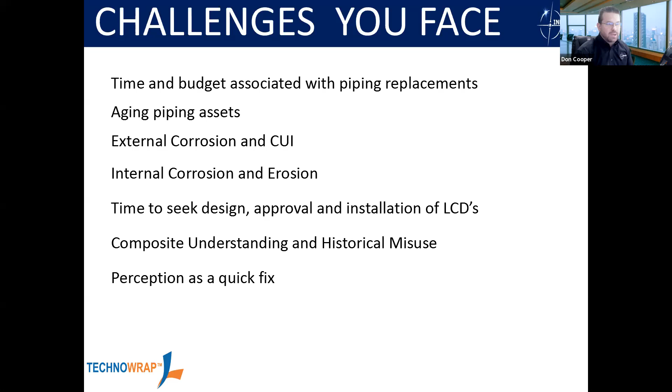I've seen comments where people say, well yeah, we've used it but it doesn't work, it didn't stop the leak. The reason for that is they were installing composite over an active leak and didn't mitigate the leak first. So there's a lot of reasons why we want to really get the information out on how to use composite properly, how to engineer it properly, how to install it properly so it's a robust engineered solution for maintaining your assets. There's a lot of perceptions of it being a quick fix, and that comes from historical incorrect uses of composite.

And then finally, particularly in Canada, there's a challenge of local pressure authority approval and acceptance, for a lot of the same reasons I mentioned around historical misuse, that we haven't yet gotten solid recognition with all of our pressure authorities on a systematic step-by-step way that we engineer, install, and get the right competency of our installers qualified in the same way we would do any other pressure component repair.

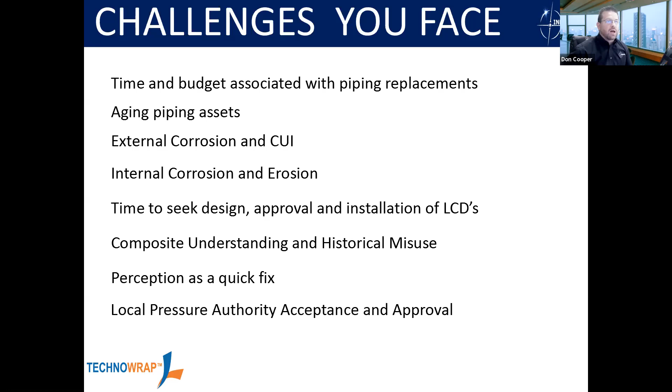Don, you framed that really nicely in terms of some of the issues people have had with composite repairs in the past, and it's something we've seen a lot of as well, unfortunately, as is the misuse of composite repairs. What I'm going to do is frame a little bit of the background of composite repairs, a bit about who we are and some of the benefits. I'll talk through some of our product range, and then I'll hand over to Gareth, who will take you through some of the technical detail.

I'm sure there's a mix of different levels of understanding of composite, so I'll take it back to the basics. A composite repair is used to restore the serviceability of pressure systems, pipelines, or structural components that historically have been damaged or weakened by corrosion. So what they allow operators to do is extend the production life of their plant or asset.

The Technowrap brand itself has been around since '92, so we have over 20 years of in-service history of the product. We have a big portfolio of operators we work with, most of whom are here today, all over the world, so it's great to have that experience here. We also have a really good track record of installations—about 25,000 installations worldwide—and that's only the installations we've applied with our own technicians. If you think of all the third-party applicators we've trained, that number is probably significantly more.

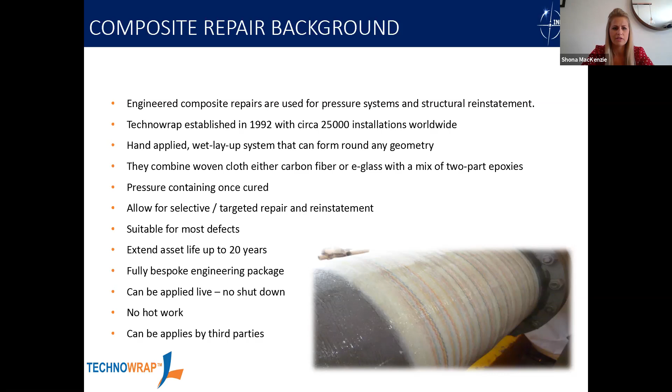I'm just going to skip on to the next slide, and hopefully there should be a video that I can run. This is just an application video that we have, showing you the basics. I'll run the video on my end.

I did notice, I wasn't sure if this video had to have sound or if you were walking through it. There wasn't any sound on it when I was playing it earlier this morning. No, that's fine, I'll just talk through the application. There shouldn't be any sound.

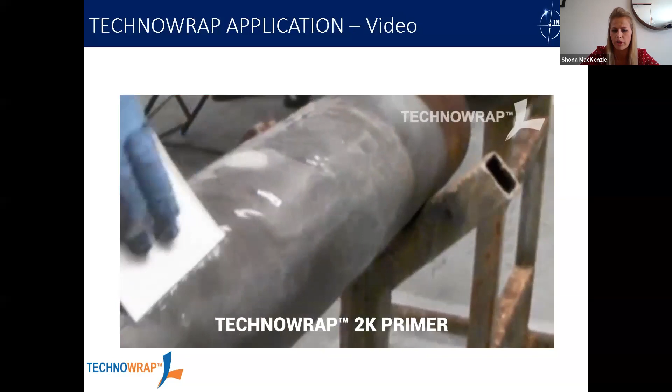A basic installation of composite repairs requires a surface preparation element at the start, so that's not included in this video. We've assumed that this pipe's been blasted, and what we do is use an acetone wash to clean off any debris on the pipework, and then we prime it using an adhesive primer.

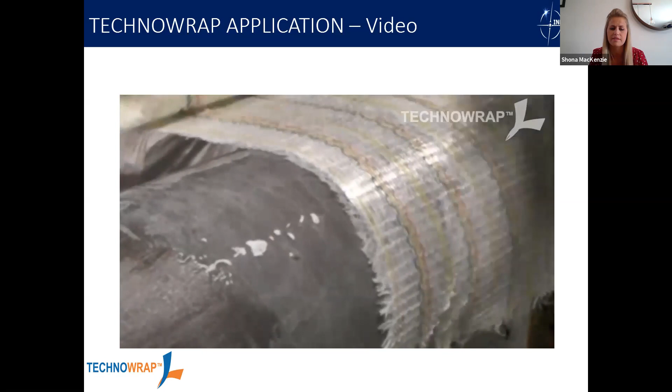What we do is we wet the resin system into the cloth itself. That resin system is in two parts, part A and part B, and they're combined and measured in the right quantities. It's wet into the cloth, and then that is applied over the pipework.

...and this is applied from the middle, and we work that all the way along the composite itself, and that pushes out any of the additional resin system that's not required, and it removes any air pockets that might be within the composite itself. Now, not all repair providers will apply their layers in stages.

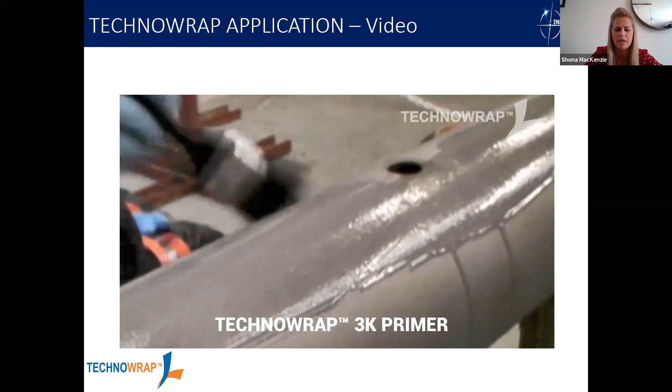So we tend to do two layers as the first application, and then we do a compression in between layers. We'll do a sort of low load cure in between, so not a full cure, but just enough to make sure there's no air pockets in between and that we've got good compression between the layers. It essentially promotes a better quality adhesive through the layers of the composite.

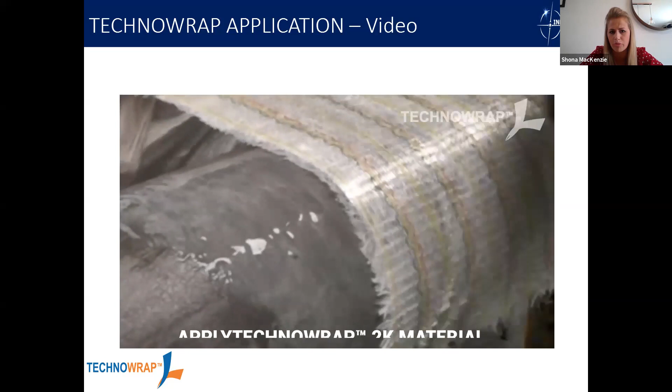Just showing you the video again, but it's relatively straightforward. As I said, it's a wet layup, so it can form into any geometry, whether that's a straight, a bend, or a T. We can account for all different geometries of pipework, which makes it a very simple and easy installation.

That doesn't mean to say that we will accept every repair. There are of course limitations to composites. So if it's not the right scenario for us, we will turn down the job. It does have to be suitable for that application.

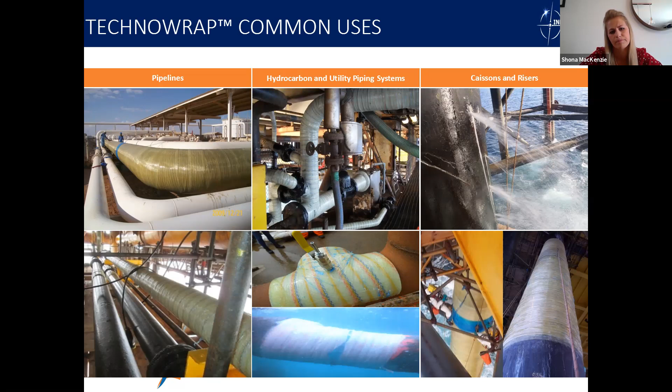Taking composites a little bit further, there are of course pressure system type repairs, but we also considered all sorts of different repairs for structural components as well, whether that's decks, tanks, roofs, cladding, beams, or vessels. There are so many different applications for composite repairs, a variety of options.

Just to answer a question that came in, Tony Preston asked about bead blasting. Can you touch on the surface prep requirements, since we didn't show it in the video? Yes, we'll come on to that, but I'll quickly touch on it now. Obviously it's the critical success factor of composite repairs.

We require good surface preparation in essentially the landing areas for our composite repairs, as does any composite. SA 2.5, like grit blasting or sand blasting, is the preferable method of preparation. However, we can also accept mechanical preparation, so ST3 prep, and on very few occasions hand preparation. You just don't get the same quality of adhesion when you use hand preparation, but if it's external corrosion on low pressure lines, we may be able to consider it. But Gareth will touch on the technical detail on that further in the presentation.

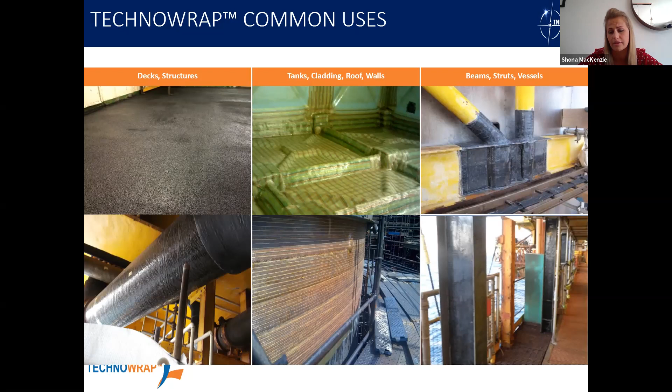We've got a variety of other comments coming in that I think we'll be able to cover as we go through, on curing time, on temperature, and specifically Jeff Wiseman is asking about ABSA approval. We'll touch on that, Jeff, so please bear with us.

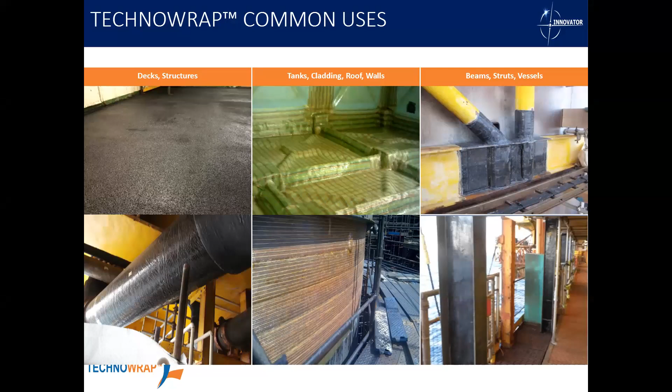Okay, I think this answers one of the questions that just popped up. There are of course limitations with composite repairs in terms of pressure limitations - you're looking at around 3,626 psi on a 12-inch line. That will vary slightly depending on the diameter itself, so the smaller the diameter, the higher the pressure it can see, but that's just a general rule of thumb. If the defect itself is through wall, we're limited to a pressure of around 725 psi.

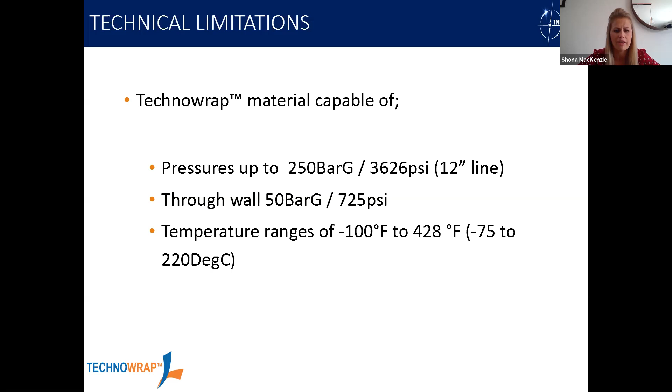And that's for a leaking defect. Temperature ranges: this is an in-service temperature of -100 Fahrenheit to 428 Fahrenheit, or -75 to 220 degrees Celsius. So there's a good range of temperatures covered for in-service temperatures there.

Looking specifically at our product range, we have 3 main types of cloth. The one we'll probably talk about most is the triaxial glass fiber cloth, our TechnoWrap 2K. That's generally used for standard piping systems, hydrocarbon and non-hydrocarbon. As I said, that's a triaxial fiberglass cloth combined with our different epoxy resin systems, which you can see listed below, and I'll take you through those.

We also have a quadraxial carbon fiber cloth, which tends to be used for more structural components or when considering external loads, again combined with any of the different epoxy resins. Essentially what we would do is complete an application sheet and make the assessment as to which cloth type and resin system should be used for that particular instance, so it doesn't have to be decided by the client.

For the resin systems, we have low temperature and high temperature resin. The low temp is a quick curing resin system at low ambient temperatures, with an in-service temperature, as mentioned previously, of -100 to 200 Fahrenheit. The high temperature resin is suitable for in-service of 200 Fahrenheit to 428 Fahrenheit, and that does require post-curing or heat in order to cure the resin.

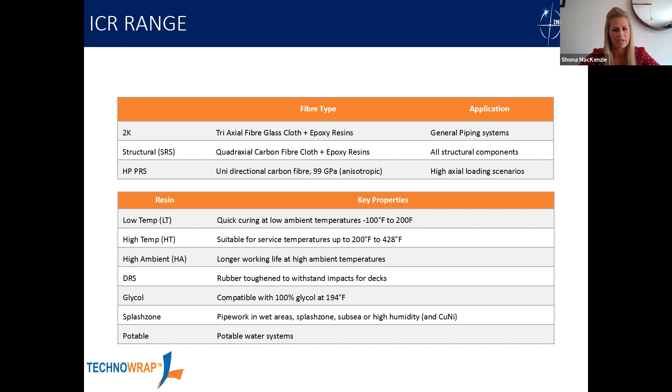So, generic types of defects - we can cover most types of defects essentially. External corrosion is the standard application for a composite repair. Obviously the application of that composite will prevent any further corrosion, and so the defect size or remaining wall thickness at the time of installation is used in the design itself. We also can look at internal corrosion and through-wall defects or leaks.

The thing to consider here is that the composite repair will not stop the internal corrosion, so we would have to assume that internal defect would grow through wall during the life of the repair itself. So if we designed it for, say, 15 years, we would need to understand the rate of corrosion or make some assumptions within that design to assume that corrosion will continue underneath the composite.

And also cracks - ultimately that depends on the orientation and the loads. If you think about axial loads, they would obviously continue to propagate out with the sides of the composite repair. If it's in the circumferential position, then it's not such an issue - we can design for a full circumferential slot. And we can also repair mechanical impacts and dents.

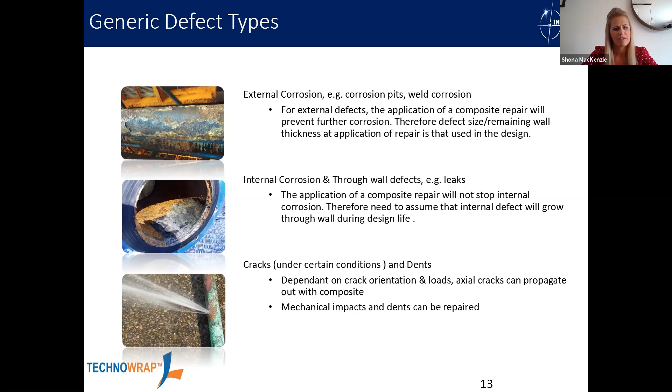One of the things we mentioned previously was the standards. There are two applicable standards for composite repairs. The one we use in the UK is ISO 24817. In America and Canada, I believe it's ASME PCC2. Both are essentially very similar in their standards, and they provide guidance on installation requirements, competencies, testing, and the design methodologies that we have. They are, as I mentioned, very similar in the detail within the document.

There's not any significant differences. The main difference is the design life. ASME classifies defects as short and long term, I believe - Gareth, you might want to correct me on that. ISO is anything up to 20 years, depending on the design conditions. Also, external loadings and temperatures are not considered within the ASME document - sorry, temperature factors for through-wall defects only is not considered. So as a result, the ISO standard gives you a slightly more conservative value when given the same inputs to both.

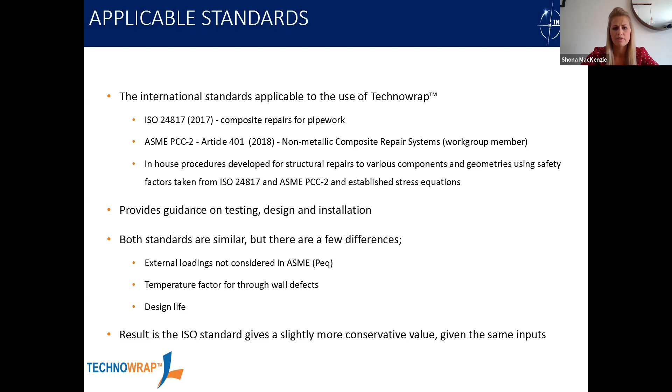So also off the back of that, we have - sorry, Don, if you could just move on to the next one - we have all of the main types of approvals and third-party assurance. So TechnoWrap has approval and certification from ABS, DNV, and Lloyd's Register, essentially just certifying that we are compliant with the ISO standards.

I'd like to just comment here and add some local flavor on the approval process within Canada. I'm not sure if Chris Coombs is still with us - I know Chris had to step away for a few minutes, but I'll give you - oh, there's Chris.

Hi, perfect. So a couple of things to consider in Canada. What Shona talked about there, particularly for onshore-based facilities, which most of our audience is likely onshore-based facilities - there is ASME guidance with ASME PCC2 that provides guidance on the system that all operators and/or pressure authorities should use in evaluating composites. Within Canada, there is precedent for approval of composites, specifically within the Z662 CSA standard for pipelines, which has clear processes and approvals for composites, and has been used in the pipeline industry under that guidance for many, many years.

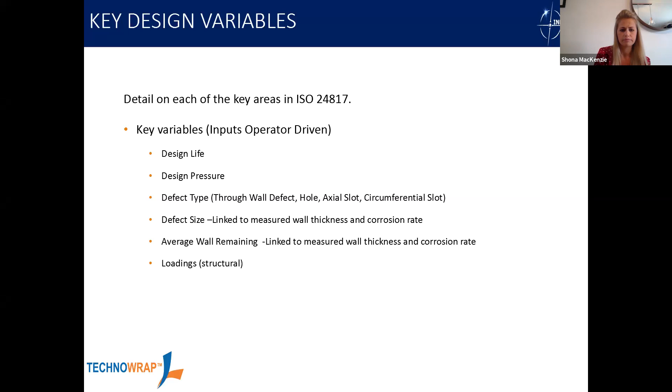Thanks, Shona. So over the last few slides, Shona and Don have both mentioned a few key words, so I'm going to go into those in a bit more detail.

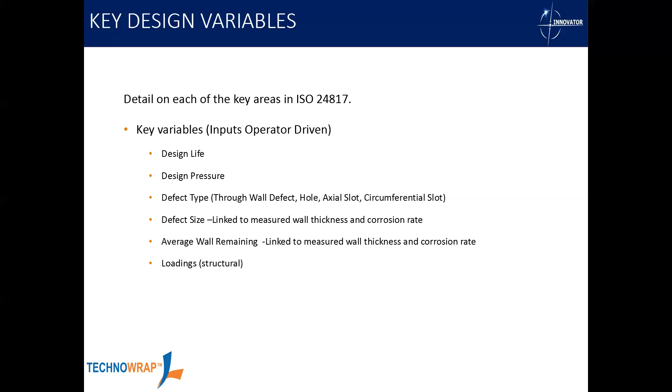The first one was bespoke engineering. They've already said all of our repairs have got bespoke engineering to support them, but what we need for that is to know what inputs to put into that engineering - things like pipe diameter, design pressures, operating conditions, all the design conditions, design lives, defect types, defect sizes, remaining wall thicknesses, any loadings, whether there's any external loadings in the pipe. So as you can see, there are quite a few design inputs, which is why we need to do each repair on a bespoke basis, as there's probably no pipe that has all of those exact same conditions anywhere on your asset, maybe in the country.

Leading on to the design life of the repair - for the ISO standard, this sets the figure between 2 and 20 years. For PCC2, as Shona mentioned, it gives you a range between short-term and long-term. However, what the range actually indicates is a short-term condition is 2 years and a long-term condition is 20 years, as per the ISO standard. So both are very closely tied. But what that does mean is, for the PCC2 standard, you can actually extend the design life out, as long as the design conditions allow - you can extend it further than 20 years if required.

What this comes down to is the actual strain within the composite. The fiberglass will probably have a failure strain of about 2.4%, maybe carbon about 1.5 to 2%. What we do is derate the allowable strain based on design life. So a short-term repair, say a 2-year repair, would have a higher allowable strain than a longer-term repair, which would have a lower allowable strain.

So simply, we're putting a bigger safety factor onto longer-term repairs, and the reason for that is creep in the composite. Unlike steel, the composite actually degrades as a function of load and time. We're not talking low loads here, we're talking near ultimate failure strain, ultimate failure stress, where you'd see the composite begin to creep. So the allowable strain actually decreases as a function of the load it's seen and the time it's been applied for.

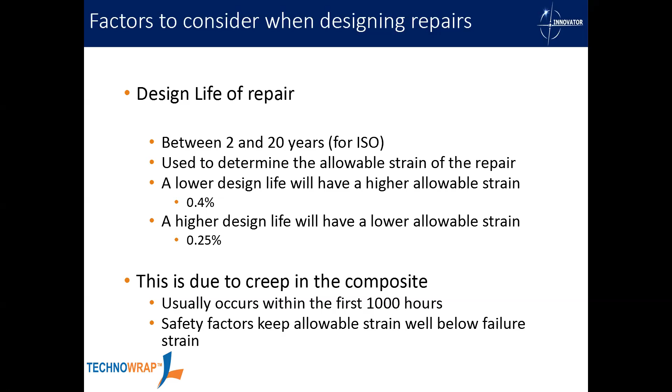So when we actually engineer a repair, there's a few questions we want to ask ourselves. We want to know initially, is the repair strong enough to carry the pressure load - that's just stress strain calculation, looking at hoop stress and axial stresses.

The next point brings in the second keyword we're looking at, which is adhesion. Adhesion is probably the most important thing when it comes to a composite repair and using composite materials to fix damaged pipework or structural components. So we want to know, is the repair actually going to remain bonded to the steel? That's an adhesion check that we do, which I'll go into in more detail on the next slide.

Also, back a slide please. Thank you - I was trigger happy there.

Too keen. So yeah, we want to know as well if there's any impact loads - will it withstand the impact? We also want to know, is the repair going to be long enough to transfer any loads into the composite? We don't just apply these repairs to just the defect - we need to go a certain landing length past the defect itself, simply to get that well-bonded zone to enable any load transfer to the composite.

What we get out is when we do the design calculation, we get a repair thickness - how thick does the composite need to be to take the applied loads? Generally that's up to about 1 inch thick. We have done some repairs...

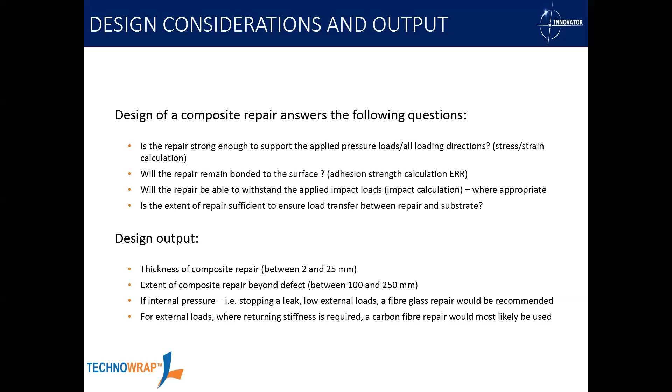Generally, where there's external loads, where stiffness is a key driver of the repair solution, we'd use the carbon fiber, simply because the Young's modulus of the carbon fiber is that much higher than the fiberglass.

So back to adhesion. As I said, this really is the most important thing when it comes to composite repairs. If we don't bond, you don't transfer load into the composite, therefore the composite isn't actually doing anything, it's not fixing the problem. And the way we quantify adhesion is with an energy release rate.

This is a fracture mechanics technique that we use to basically say what load can you transfer through a bond line without failure. The way we do this is we calculate it using pressure. So we have a set pipe with various size defects and apply pressure to failure. We can then get the data points and extrapolate for different scenarios.

And as I said, the repair performance is controlled through the adhesion. The more load you can transfer through that bond line, the better the composite will be. And there's a few factors that actually affect the level of adhesion.

One of them is surface preparation, which we've had a few questions on. That comes down to the cleanliness and the profile that's achieved. I've got a slide on that next.

Another one is the actual substrate material itself. Is it carbon steel we're repairing? Is it stainless steel? Is it Monel? Is it a duplex steel? We bond differently to all of those different materials.

And then just to add in a few more options, every repair system we have bonds differently as well. So the fiberglass will bond differently to the carbon fiber products. So there's quite a few variables again there.

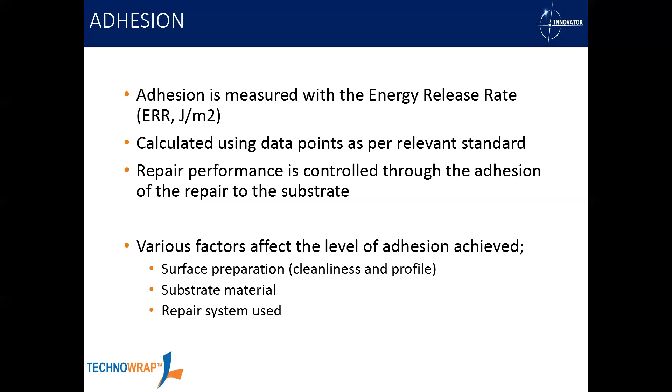So then back to that bespoke engineering that we offer, they consider all of these different energy release rates, all the different substrate materials, repair systems, the surface prep. There's a huge number of combinations there that we have to account for. Next slide, please.

So generally, we would look for a grit or sandblasted surface profile. This gives us the best cleanliness and the roughest, most irregular profile as well. So generally, we would work to an SA 2.5 standard with an average of a 60 micron angular profile.

In some circumstances, we can apply hand prepped profiles, but if you've ever tried using emery paper and files and needle guns, it takes a very long time to even remove a layer of paint. So it can be very difficult to get a very rough profile and a very clean pipe as well. But it may be suitable for low pressure drain lines, but anything more than a bar or two, it wouldn't be suitable whatsoever. So generally always aim for the best, which is the grit or sandblasting to SA 2.5 and 60 microns.

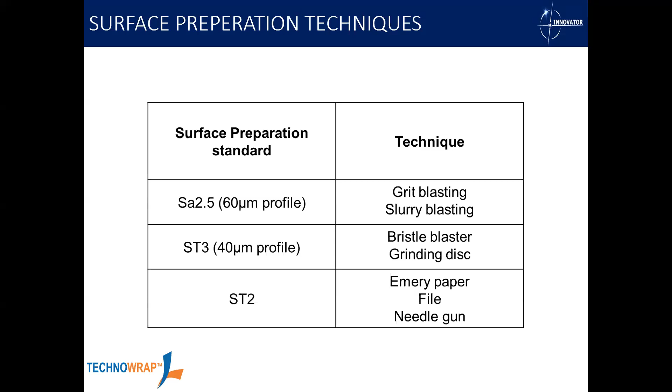One of the biggest problems that I've seen with so many clients who try to self-perform this is the surface prep tends to be hand surface prep like what you're mentioning here, and they just don't get a bond, and they then deem that the repair doesn't work, but it was all in the installation process. And we'll touch on active leaks here in a little bit as well, because I know we've had some questions on that.

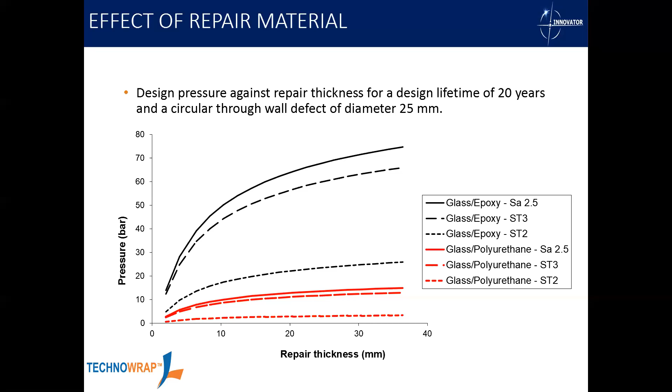What's important is that we've carried out the testing to establish the data for each different scenario. For every surface substrate type, we've done different levels of surface preparation and tested our various repair materials on there. So if you come to me requiring a design calculation, we have that data to back up the calculation itself - which is very important when you're supplying engineered repairs.

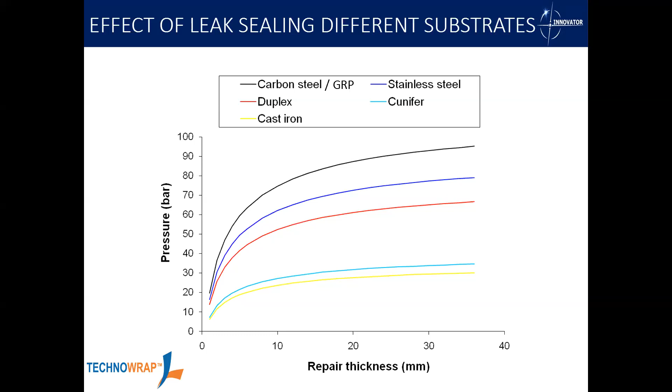So now we'll move on to a bit of the life-size testing or scale testing that we've done on some of our repairs. We've done a huge amount of testing, so this is just a few of the more interesting projects that we've worked on.

The intention of the test was to see if we could seal up the through-wall defects. But it turned out the spool was designed incorrectly, so there was so much movement in the T-piece itself, hence the vernier gauges. It was actually moving about 1.5 inches at about 20 bar, so it was flexing so much it was almost breathing, which was quite strange for a test piece.

The test was to pressurise it to 20 bar for 24 hours, then cycle between 2 and 20 bar at 6 cycles per hour for 24 hours, and then take it to failure. It failed just short of 40 bar, so we got quite a decent reading off that. We got a good result once we'd realised that constraining the steel and stopping its movement was the key to passing this test.

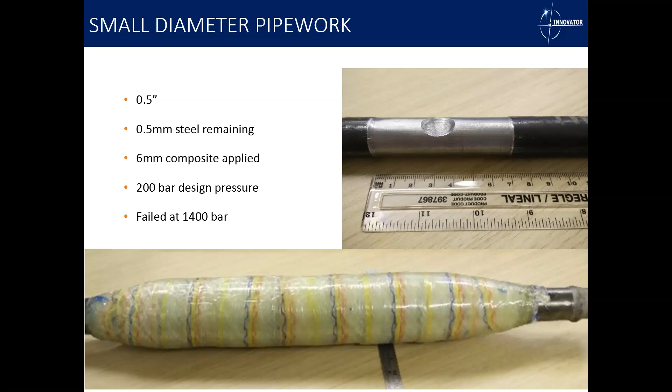Within the PCC2 standards and the ISO standard, it allows you to qualify high temperature materials without testing them at high temperatures. So basically you can qualify it at room temperature and say it's good up to 220 degrees Celsius. So we thought, well, maybe we should do a test somewhere in between ambient conditions and the maximum temperature. So what we did was use our high temperature material and applied it to a pipe or a spool.

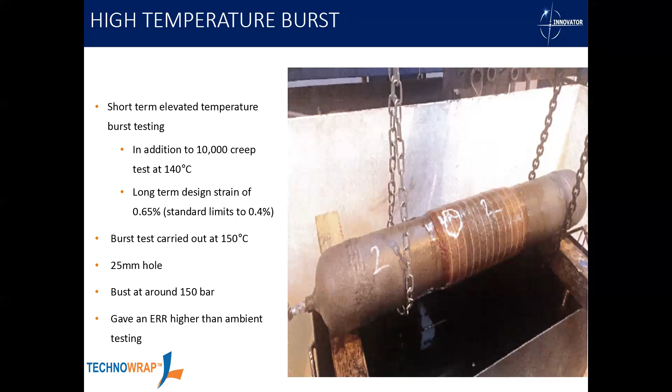So, next slide please. We'll move on to a few case studies now. Again, these might not be quite applicable to whatever pipes or repairs you have, but I simply picked a few fairly interesting repairs to give a broad scope of what repairs we've done in the past, how we've gone about doing it, and what the end result was.

So this was an 18-inch hydrocarbon line, and this was internal erosion. When you have internal erosion or corrosion, the composite doesn't stop the corrosion or degradation mechanism. So you need to be careful with what repair size or defect size you estimate, because we need to estimate for an end of life scenario. That internal erosion is going to carry on, the defect's going to keep growing, so we need to make a good estimation on that.

That's not something we do ourselves, we work with the client. We'd look at what's going on, if there's any similar scenarios on the line you've had, if there's been any corrosion monitoring over the years, and we'd work together to find a realistic and sensible value to use in our engineering. We'd then carry out all the engineering, and the scope would be executed using our fiberglass 2K repair system, our low temperature resin.

I guess we've gone over some of the benefits already, but there's obviously no hot work, and we're reinstating the hoop and axial stresses there. We applied it while it was live, and although this one had a 3-year design life, simply because of that internal erosion, it can be designed to last longer.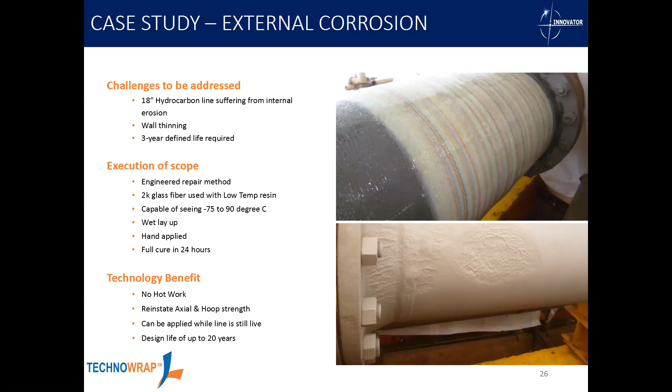Next slide, please. So I believe this is a video of a caisson that we repaired where there were quite a few leaking defects. It was almost leaking like a sieve. There were, I think, about 40 defects along the length of this caisson. As soon as we plugged one, another one leaked.

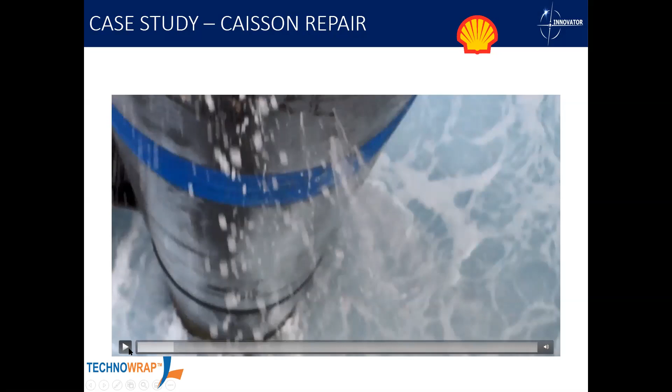But what's important is we need to ensure that the defects are not leaking at the time of the composite application. So it's very, very important that you plug the defect and ensure it is no longer leaking, as if it is leaking, it will affect the integrity of the engineered repair.

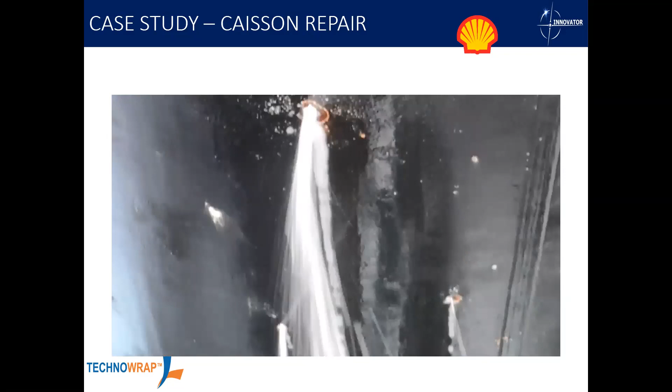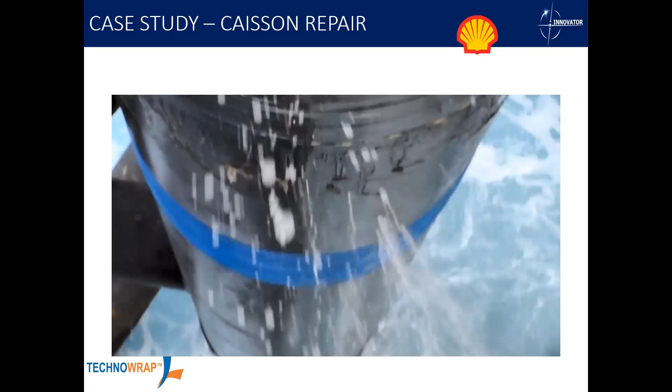Fairly small defects on this, but nonetheless they were tricky to repair with such a high number of them. Yeah, there's just a few leaks on this one. Yeah, a few too many, I think. I've actually seen worse.

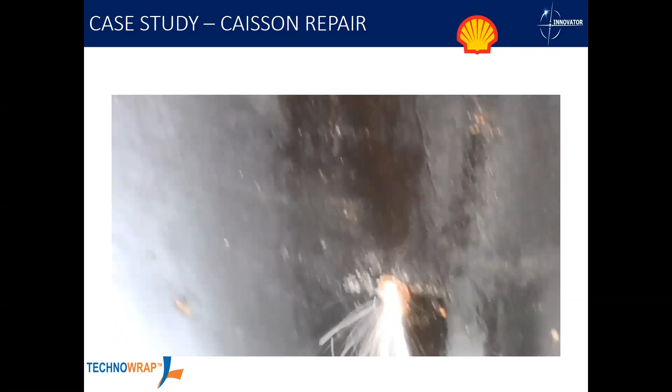So this is going into more in-depth detail on that previous video with the leaking caisson. We used quite a few different methods of sealing up the leaks, but the one we found probably most repeatable was to use small composite plates with epoxy putty and straps. What we could do is push the epoxy putty into the leaking defects with the straps and composite plate to get them sealed up.

Other areas just had epoxy putty, some areas had rubber bungs applied. It's basically anything we could do to stem that leak until you get the composite repair applied. Then simply what we did was apply the composite along the length of the caisson. In some areas there was just fiberglass, other areas there was also carbon fiber used depending on the load scenarios, which section of the caisson it was on, whether it was near the dead weight support or not.

Go on to the next slide, please.

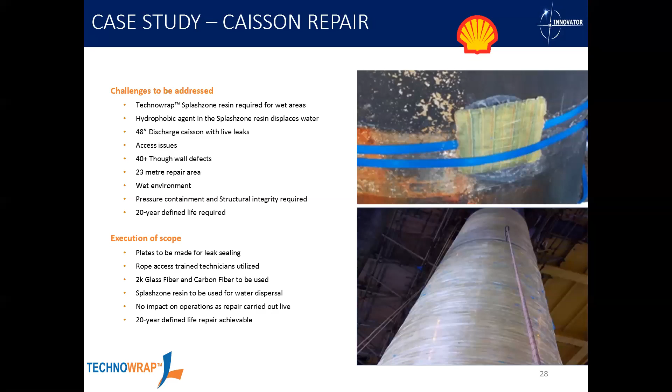So this was another caisson. You can see we've used the carbon fiber here, simply because of the loads going through this section. There was internal pressure, but also bending moments that had to be accounted for. The landing lengths were quite limited, certainly in the lower section, because there was a nozzle coming out the back of the larger diameter section.

Again, similar sort of benefits to the previous repairs. No hot work, and we could apply it localized just to that area. Changing out that damaged section would have been a nightmare because it sat right underneath the flange, so it would have meant changing out the whole T section, which wouldn't have been the easiest.

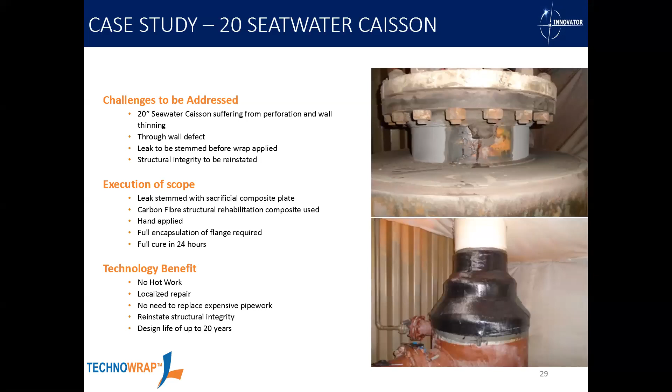So this is another caisson that we've repaired. This was in the North Sea.

With caissons, when you actually design and engineer them, the main consideration is the wave loading. In this case, it's a 100-year wave, which resulted in a 100 kilonewton bending moment, and also a 25 kilonewton axial load to be applied. The internal pressure was pretty low, so that wasn't what was driving the repair. It was a huge wave basically slamming into the caisson that we had to design for.

And as there was internal erosion, we had to design for separation of the caisson. So we had to go slightly outside of the international standards and apply some of our own methods, looking at the adhesion of the caisson and ensuring the inner steel wouldn't slide out the bottom of the composite. Something that was slightly different on this one was the client wanted us to wrap through lateral guides.

As you've seen in the videos, these composites need to be applied by hand, and quite clearly, where the lateral guide is situated, you can't physically get your hand to the area to apply the composite.

So what we did was manufacture some steel sleeves - you can probably just see in the picture in the bottom right hand corner, there are two pad eyes either side. We supported it just above the lateral guide, wrapped it in composite, had it supported on ropes, wrapped it up, then slid it down through the lateral guide.

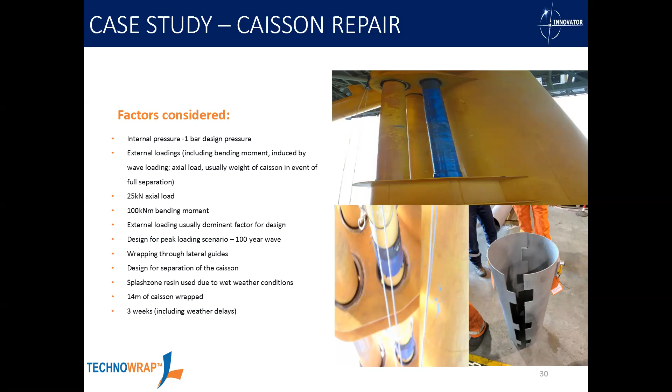This repair, again, was on a caisson, but what I want to show you here was more some of the trickier repairs that we've done. Our client very kindly told us this was a pinhole defect, and when our technician got out, it clearly wasn't a pinhole in the slightest.

What was quite difficult about this was one half had the caisson going down to the sea, and this is a nozzle coming off that was fixed. So the sea was actually causing quite a lot of movement over that damaged area. Luckily, again, the pressure was quite low.

So what we did was apply the composite just to the landing areas while the defect still leaked, and then formed a composite plate, almost like a piece of guttering, that we could bond over that area just to keep the flow going through the nozzle rather than pouring out the side of it.

So we had the composite applied to the landing areas, had this piece of composite guttering bonded on to stop the flow of water, and then used our fiberglass to start chasing it into the middle of the repair and eventually overwrapping the whole thing. As there were some fairly significant loads, we then had to apply the carbon fiber on top of that to deal with any loads over the lifetime of the repair.

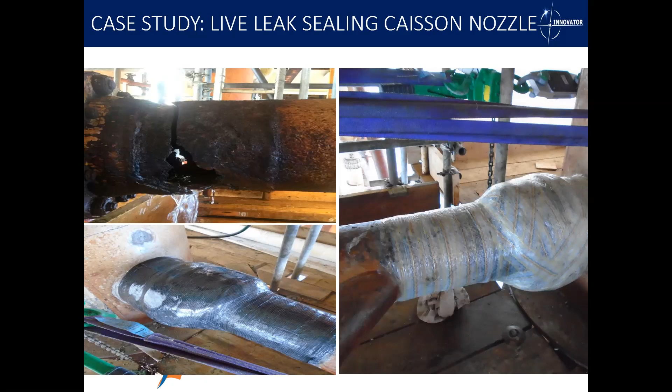That was done two years ago, and again, that's still in place now and still containing pressure, and it still looks as good as new.

So this was a section of pipe that we repaired in the Middle East. Trying to keep the cost down for the client, we actually only started off by repairing the T-piece, but as we did more sandblasting, more defects were revealed, but they were much smaller defects.

So what it meant was we could engineer the repairs for different locations of the pipe and different defects that we found. In the T-piece, I believe we had 14 layers. On some of the straight sections, we only had 4 layers of composite, and some of the bends and larger defects were somewhere in between.

So what it meant was we could apply the correct amount of composite for the defect that was discovered. We could have quite easily applied 14 layers over the whole length of pipe, but the costs would have gone through the roof, and we would have had technicians on the asset for a long time. So it made sense to keep it as bespoke as possible and engineered for each section.

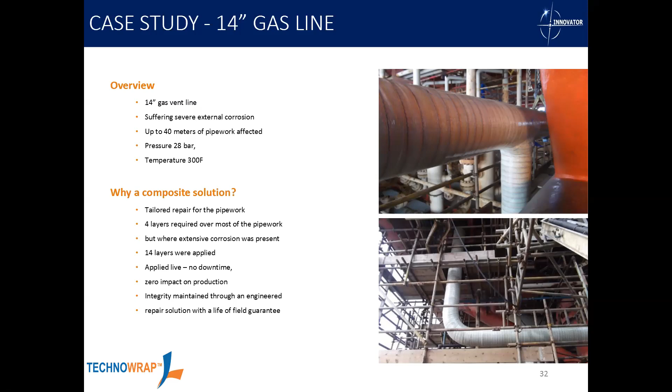And I believe that was about 40 meters of pipe as well that we repaired. And this one was a repair we did in South Africa.

What's slightly different about this one was they had to apply some clamps first to stem that leak. This was actually carried out by some technicians on the site already, not our technicians. They clamped it up, but then they wanted to get design life. They wanted a fully engineered solution that would last them 10 years.

So we then treated the clamps as defect areas. We applied the 10-year design life. So what we actually designed for was a clamp failing.

And then, as you can see, we wrapped over the whole area. We achieved really good compression over those areas. You can actually see the bolts almost pushing through the composite there. We got such a good level of compression. And that was all applied live as well, so it meant they didn't need to do any shutting down or anything.

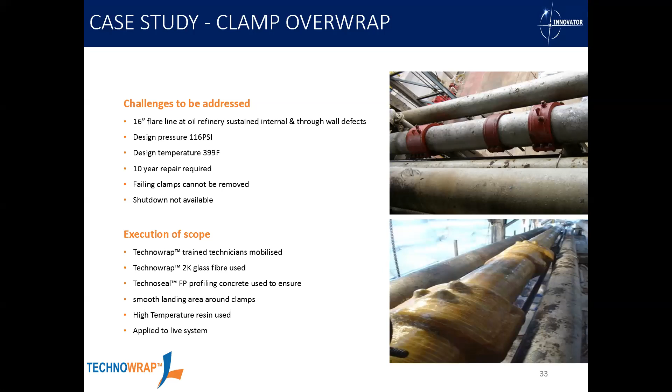And the final case study now. This was, again, one from the Middle East. What had happened was they had pressure tested the stainless line about a year or two previously with salt water, but it had never been drained. So when they then brought it into service, all the welds had corroded out.

So you can see what we've done here. We've basically gone round and wrapped every single weld in composite. A few of them had clamps on, so in the picture in the bottom right, you can see there's a clamp there that we overwrapped. But in the picture in the bottom left, you can see that we applied it straight onto the weld.

Designed with through-wall defects in mind, even though some of the welds weren't leaking at this point in time, they may continue to leak or corrode and eventually leak within the design life of the repair. So this is something we have to speak with the client about, to define exactly where the defects will be so we could make sure the wraps are the correct length and thickness for the projected defects. The nature of the corrosion was only very small pinholes, so we could design for the full weld actually corroding away.

And again, that was done quite a few years ago now, I think maybe 7 or 8 years ago. And again, it's still in service and performing exactly as it should.

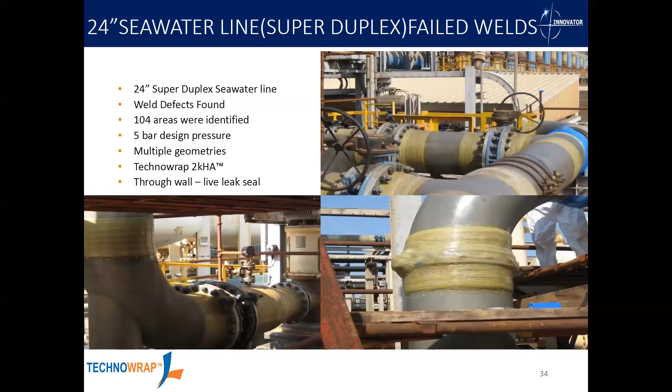So I think that's everything from me. Yeah, absolutely, we're going to jump now into Q&A. I'll just say to everyone...